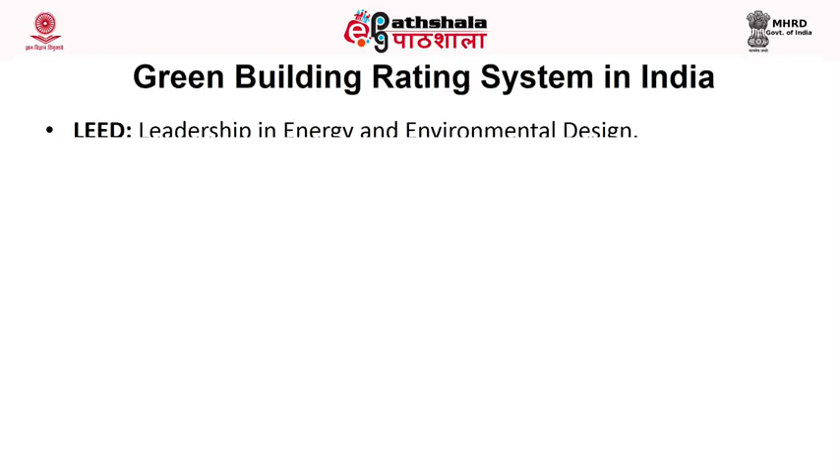Now let us discuss the green building rating systems in India. One of the systems for rating of the building is LEED, that is Leadership in Energy and Environmental Design. Rating in this system is given as silver, gold or platinum on the basis of the credit that can be achieved or earned based on the following 7 parameters:

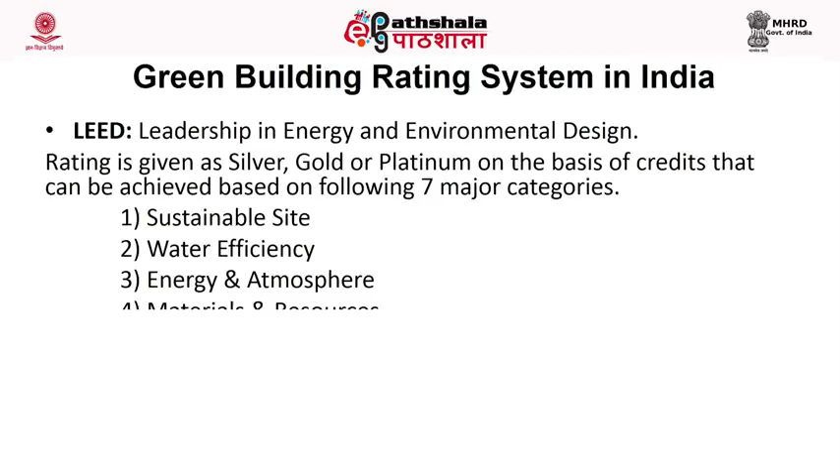the sustainable site, water efficiency, energy and atmosphere, material and resources, indoor environment quality, innovation and design process, and regional priority.

The other rating system for the buildings is Indian Green Building Council. So the rating system or the criteria upon which the building is rated is similar to that of LEED.

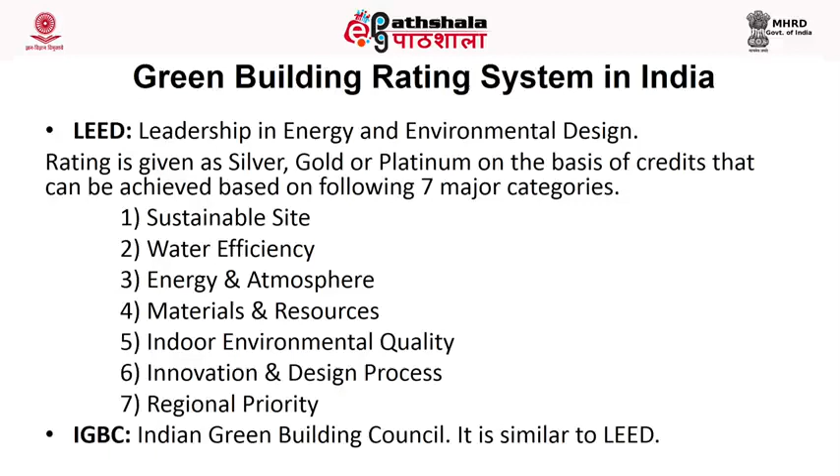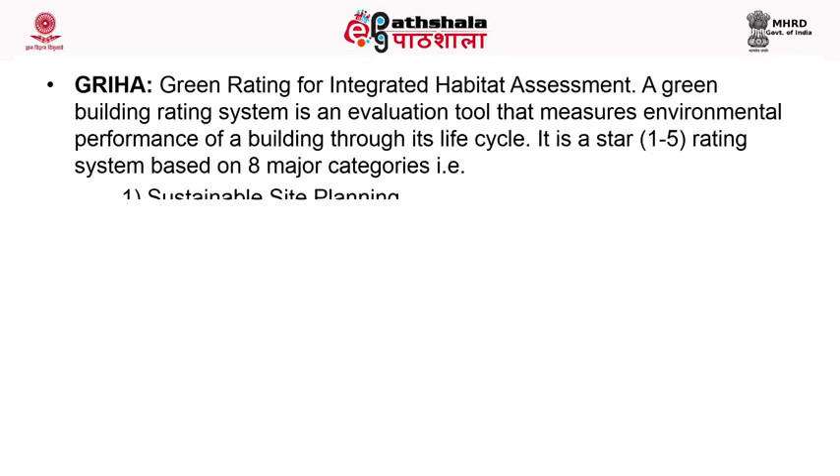Now the third system is Griha, which is more popular as compared to the previous two. Griha is Green Rating for Integrated Habitat Assessment. A green building rating system is an evaluation tool that measures environmental performance of a building through its life cycle.

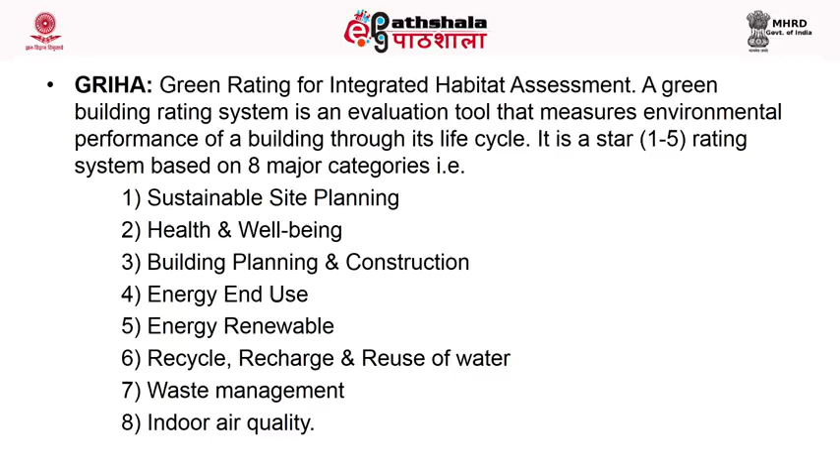Now the rating under Griha is awarded on a 1 to 5 rating system, and the different parameters on which the points earned decide the rating of the building. Now the 8 points are sustainable site planning, health and well-being, building planning and construction, energy end use, renewable energy use, recycle, recharge and reuse of water, waste management, and indoor air quality.

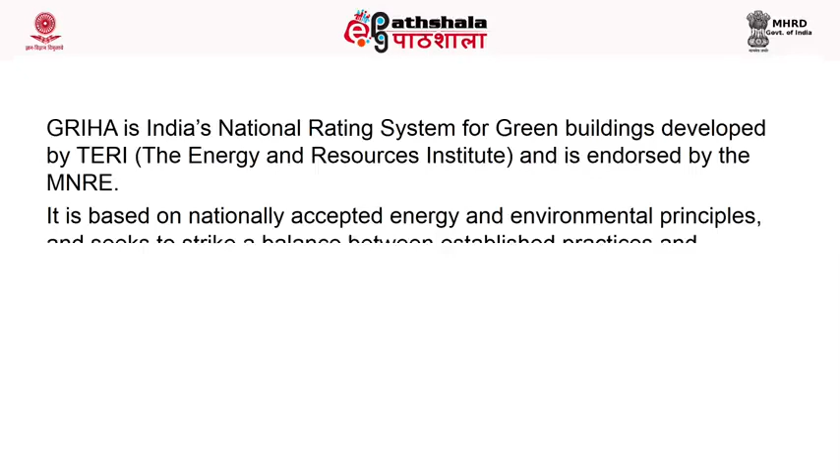Now Griha is India's national rating system, and it was developed by the Energy and Resources Institute, and it was endorsed by the Ministry of New and Renewable Energy, Government of India. It is based on nationally accepted energy and environmental principles and seeks to strike a balance between established practices and emerging concepts, both at national and international level.

Griha attempts to minimize a building's resource consumption, waste generation, and overall ecological and environmental impact by comparing them to certain nationally acceptable limits or benchmarks.

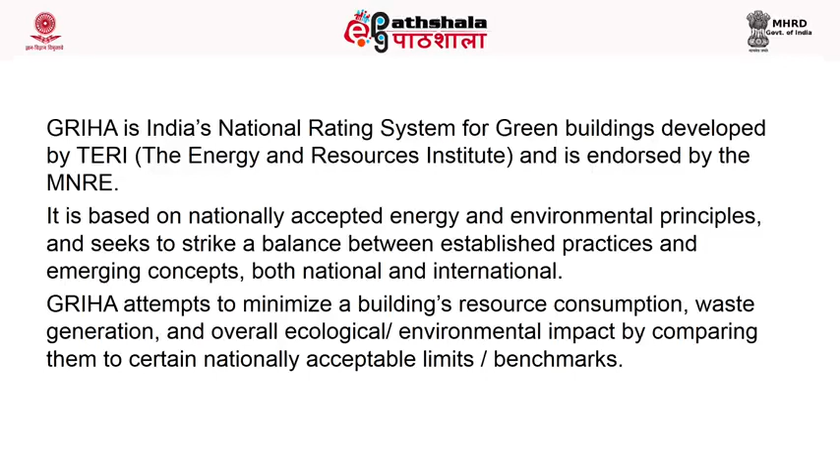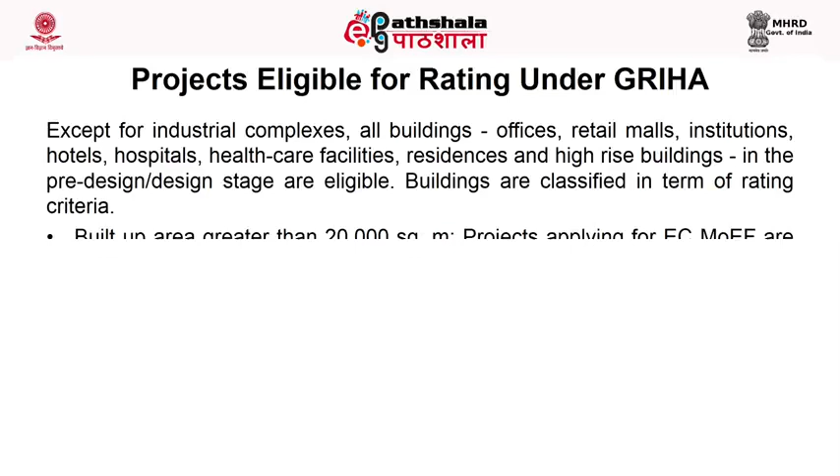Now the different projects which are eligible for Griha rating are classified as: except industrial complexes, all buildings, offices, retail malls, institutions, hotels, hospitals, healthcare facilities, residences, and high-rise buildings are eligible for rating under Griha.

Now the buildings which are rated under Griha are classified as, number 1, those with built-up area greater than 20,000 square meters. In this category, projects applying for environmental clearance to MOEF are eligible to apply under this category. It is mandatory to register the project under Griha rating after the pre-certification has been awarded.

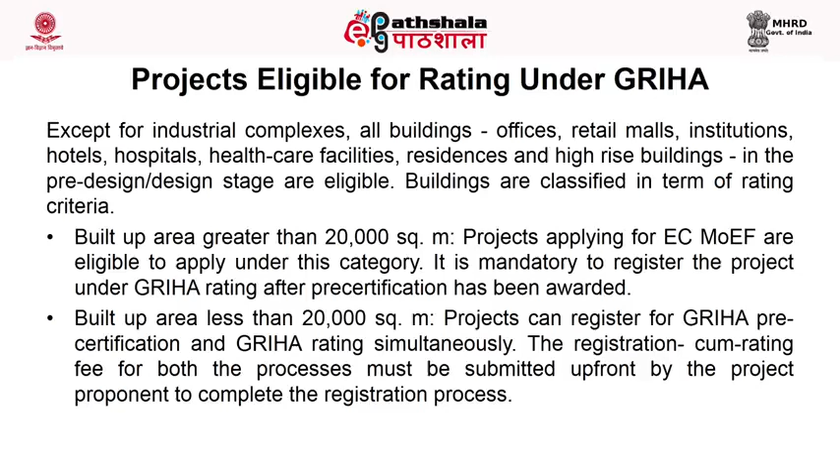Now the second category is where the built-up area of the building is less than 20,000 square meters. Project can register for Griha pre-certification and Griha rating simultaneously. The registration-cum-rating fee for both processes must be submitted upfront by the project proponent to complete the registration process.

Now let us discuss the registration process. The registration should be completed at the onset of the project cycle as there are several important issues that need to be addressed at this stage only.

On submitting the online expression of interest, the project team submits a proposed development plan with a recent date-stamped site photograph. Association for Development and Research of Sustainable Habitat, that is ADaRSH, it shall then review the feasibility of registering the project for Griha pre-certification. Once approved by ADaRSH, the project can proceed with the payment of registration-cum-rating fees and pre-certification process.

The structure of the pre-registration fees is: for buildings having area less than 5,000 square meters, that is rupees 3 lakh 14,000. Now if the area is more than 5,000 square meters, for additional square meter, rupees 3 and 75 paisa, apart from rupees 3 lakh 14,000. That is the registration fees.

In the post-documentation stage, all necessary proof through documents for the points targeted is submitted and then evaluated by third-party regional evaluators to determine the final rating to be awarded to the project. During the construction phase, the ADaRSH team carries out 3 visits to check the on-site compliance of relevant Griha criteria.

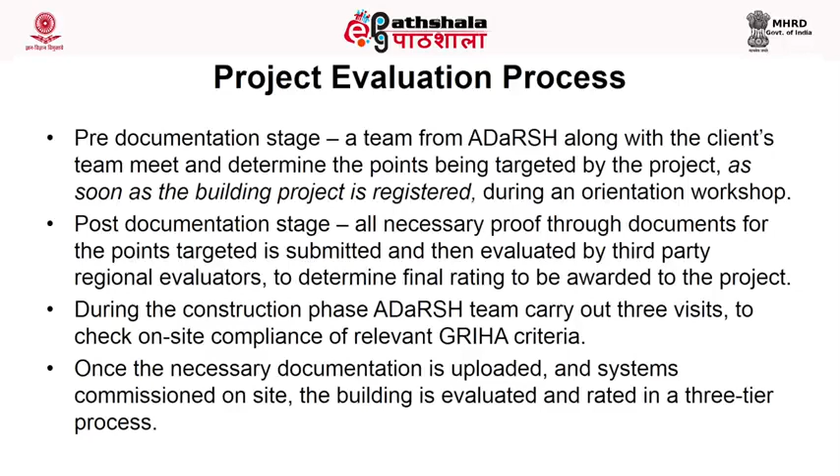Once the necessary documentation is uploaded and the system commissioned on site, the building is evaluated and rated in a 3-tier process. That is, the preliminary evaluation is done by the expert from ADaRSH. The project is rejected if mandatory criteria are not complied with at this stage only. The team then evaluates the optional criteria and estimates the total number of achievable points.

Now the next stage is, all compliance documents are vetted through the appraisal process as outlined by Griha. After this, the evaluation report is given to members of an evaluation committee comprising external experts.

The members independently review and award points. It is believed that sustainability is always local, and thus also believe that the people of a specific region of our country know their local requirement best.

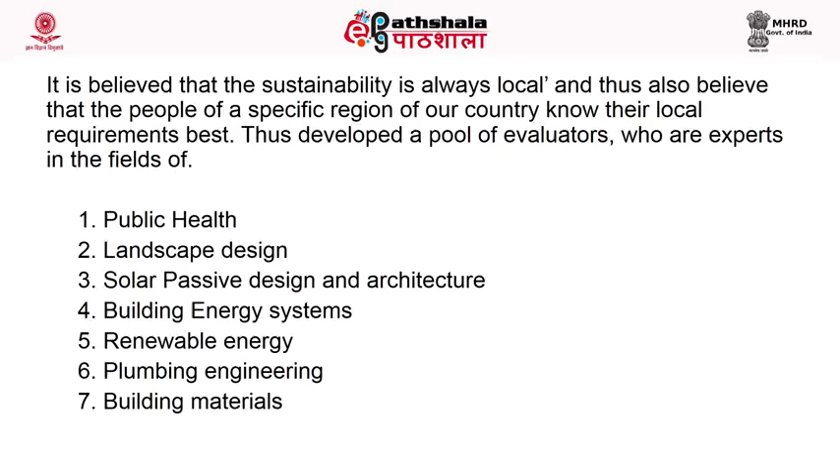That is why a pool of evaluators is developed by Griha who are expert in different fields such as public health, landscape design, solar passive design and architecture, building energy systems, renewable energy systems, plumbing engineering, building materials, etc. This pool of experts conducts the evaluation for the building in their respective areas. A provisional Griha rating is awarded after evaluation of documents submitted for rating, and the final score is presented to the National Advisory Committee for approval and award of the final rating.

The final Griha rating is awarded after receipt and evaluation of the post-occupancy performance audit report after 1 year of building occupancy. The building is rated 1 to 5 star depending upon the points scored as per the compliance of different criteria points. The rating awarded is valid for a period of 5 years from the commissioning of the building.

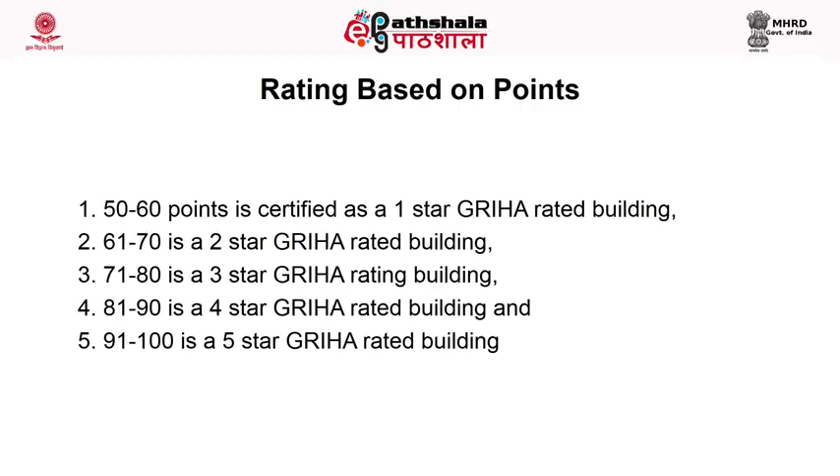The basis for rating based upon the points scored by each building is: below 50 points, there is no rating. From 50 to 60 points, the building is rated 1 star Griha rated building. 61 to 70 is 2 star, 71 to 80 is 3 star, 81 to 90 is 4 star, and 91 to 100 is 5 star Griha rated building.

The different criteria points are site selection and site planning, which is worth 8 points. This is the breakup of that 8 points, and in all there are 34 points under 8 headings. The first is site selection and site planning.

The main objective of this criteria point is to maximize the conservation and utilization of resources, that is land, water, natural habitat, fauna, and energy conservation, and to enhance system efficiency.

The different points under this criteria are: site selection, preserve and protect the landscape during construction, soil conservation, design to include existing site features, reduce land paving on site or provide shaded hard paved surfaces, enhance outdoor lighting system efficiency, plan utilities efficiently, and optimize on-site circulation efficiency.

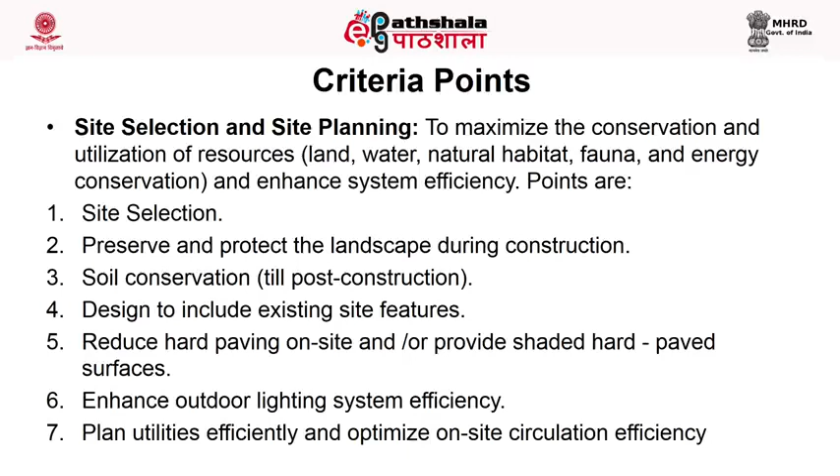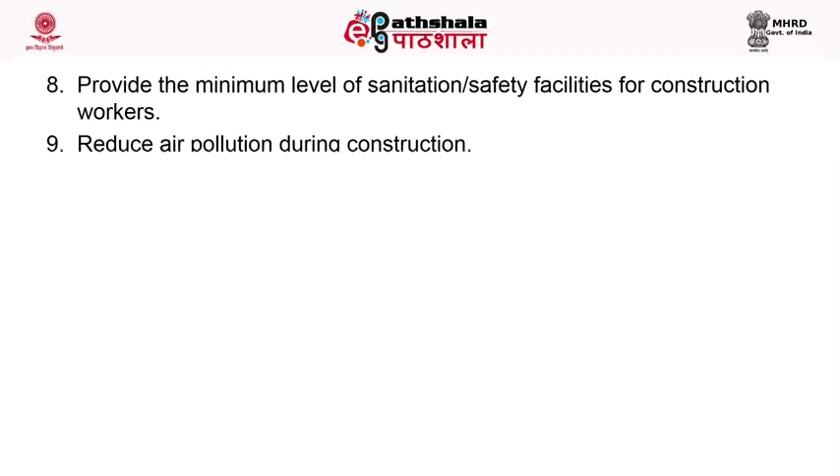The next point under that main criteria is to provide the minimum level of sanitation and safety facilities for construction workers, and reduce air pollution during construction. These are the 9 sub points under site selection and site planning.

The next main heading is the building planning and construction stage. The objective of this criteria is to maximize resource conservation, that is water, energy and materials, and enhance efficiency of the system and operations. Under this main heading, the different points are: reduce landscape water requirement, reduce building water use, and efficient water use during construction.

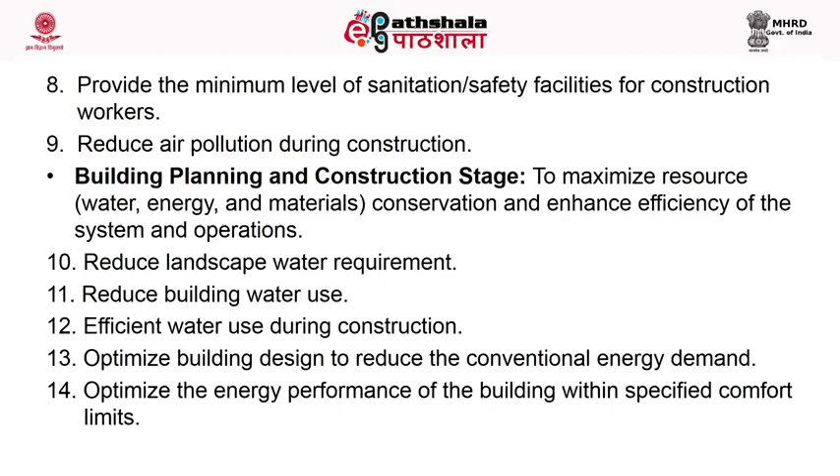Optimize building design to reduce the conventional energy demand, and optimize the energy performance of the building without sacrificing specified comfort limits.

Utilization of fly ash in the building structure. I may add here that fly ash is a product of the coal-based thermal power plant, and now the technology is available for the use of fly ash for construction, for manufacturing of bricks, and its use as one of the intermediates in the cement industry.

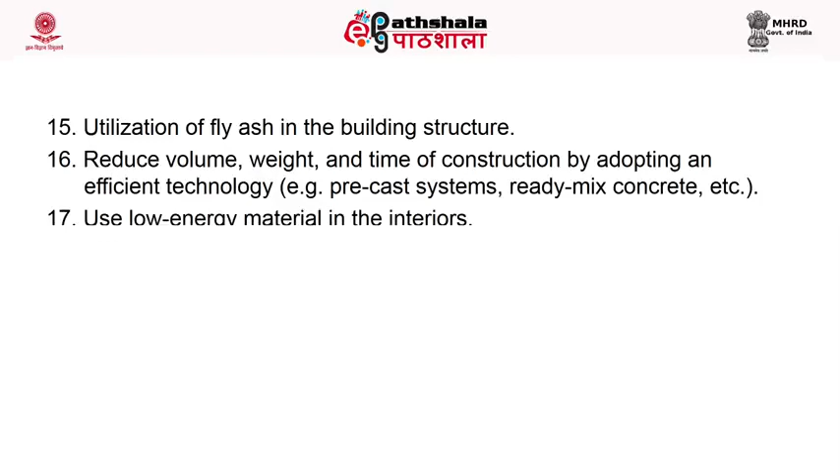The next point is to reduce volume, weight, and time of construction by adopting an efficient technology, for example, the precast system, ready mix concrete, etc.

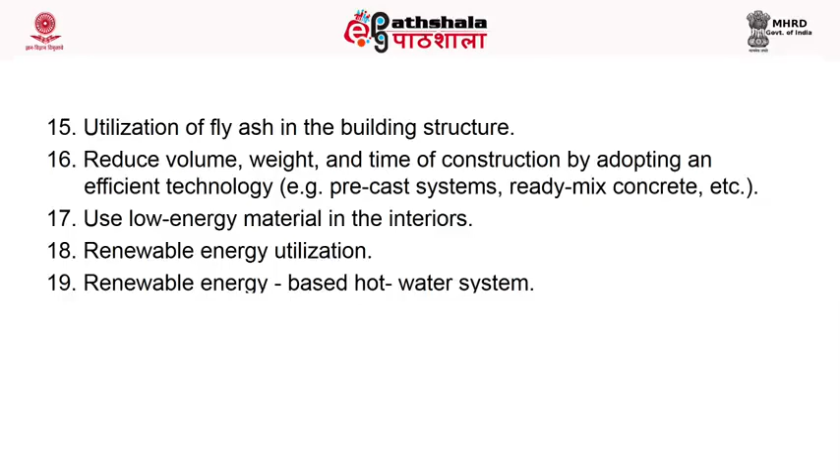Use of low energy material in the interior. It means that material used should be selected in such a way that the energy consumption in their manufacturing is minimum.

The next point is renewable energy utilization, that is use of solar, wind, biomass based renewable energy systems depending upon the situation, and the renewable energy based hot water system. The solar water heater is one very important example, which can be utilized to supply hot water.

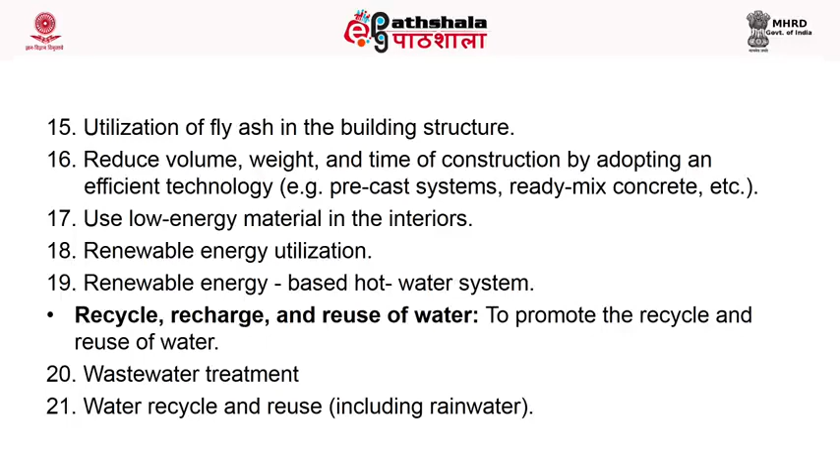The next main heading is recycle, recharge and reuse of water. The main objective of this criteria is to promote the recycle and reuse of water. Under this main criteria, the different points are wastewater treatment, and water recycle and reuse, including rainwater.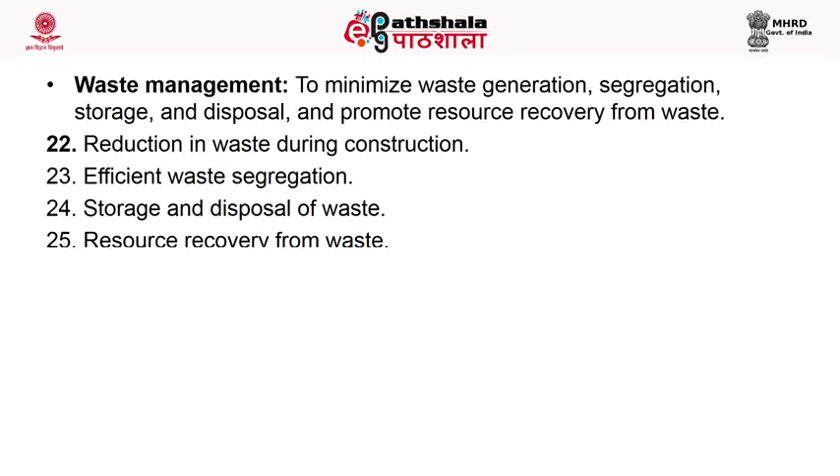The next main point is waste management, and the objective of this category is to minimize waste generation, segregation, storage, and disposal, and to promote resource recovery from waste. Under this criteria, the 4 points are: reduction in waste during construction, efficient waste segregation, storage and disposal of waste, and resource recovery from waste.

The next main criteria is health and well-being during post-construction occupation. The objective of this criteria is to ensure healthy indoor air quality, water quality, and noise level, and to reduce the global warming potential.

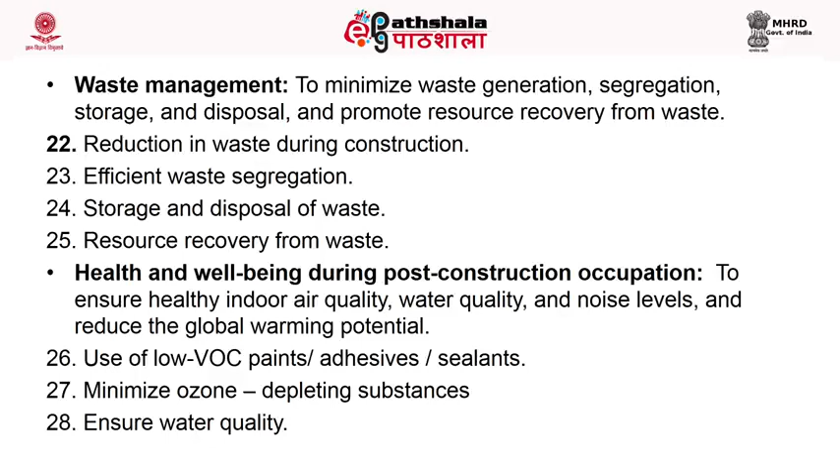The different points under this criteria are: use of low volatile organic compound paints, adhesives, and sealants; minimize ozone depleting substances; ensure water quality; acceptable outdoor and indoor noise levels; tobacco and smoke control; and provide the minimum level of accessibility for persons with disabilities.

The next main criteria is building operation and maintenance. The objective of this criteria is to validate and maintain green performance level, and adopt and propagate green practices and concepts.

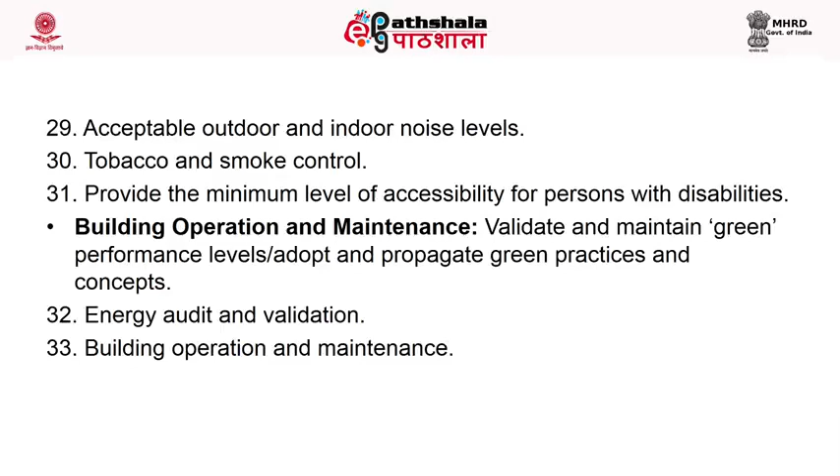The 2 points under this criteria are energy audit and validation, and building operation and maintenance. We have discussed in detail regarding the energy audit in one of the previous modules.

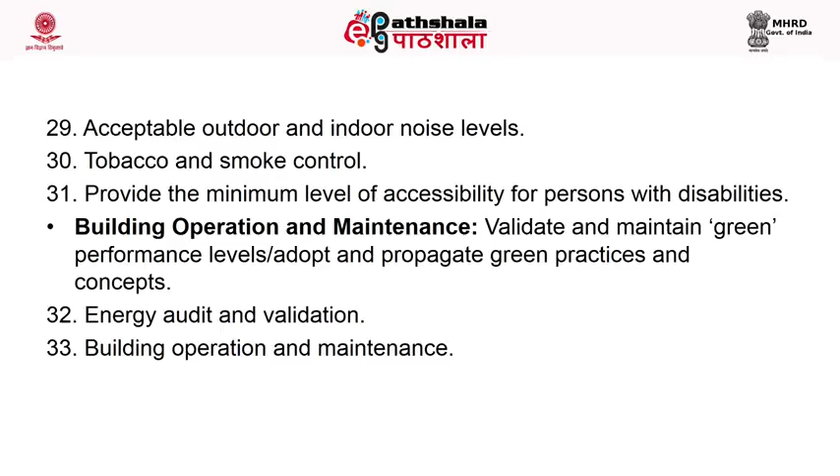Now, the last main criteria is innovation.